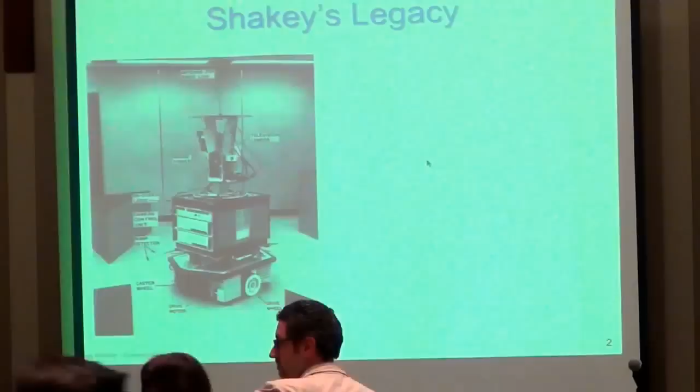In reflecting upon Shakey's legacy, I think the important point is that it provided a design pattern for an intelligent robotic system, including a vertically integrated system of subcomponents all the way from motor controllers, sensors, low-level controls, up to the highest level STRIPS-based task reasoning, which was really impressive for the time. This led to a design pattern that has been used ubiquitously in robotics over the last half-century.

What really got me excited about robotics 25 years ago when I started thinking about these problems is the idea of search-based artificial intelligence. In 1989, I joined Stanford and started thinking about how we could build computer programs that could compete at the level of humans. Then, in 1997, it finally happened: Deep Blue defeated Garry Kasparov.

What was interesting to me about the way the machines solved these problems was that they could do planning in the sense that they could reason about the consequences of actions. Deep Blue might examine 200 million chessboards per second, and that wouldn't be the way a human would solve the problem, but it sure is effective. My thought was, how can we leverage and build computer programs that enable robots and computers to exploit the skills they're good at, and maybe have humans fill in the gaps or the things they're not good at.

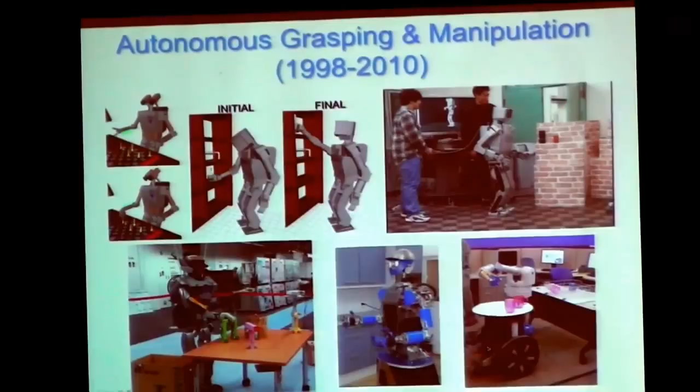I started looking at humanoid motion planning with various robots around the world, and one of the efforts I started looking at initially was autonomous grasping and manipulation. I'm going to explain how the planning in the A-star search developed for Shakey influenced a lot of the research and planning that my group at CMU got involved with, and things I'm still interested in.

I'm not sure why the movies are not playing. It's rather unfortunate. Let me just see if I do this way. I wonder if it works.

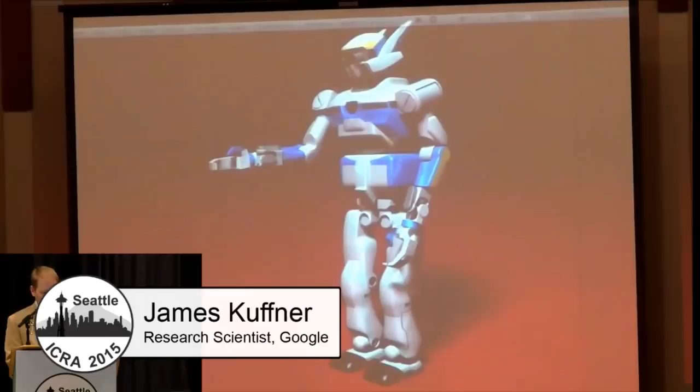Here we go. Okay, sorry.

One of the trade-offs here was that we wanted to make the common case fast, and have a computation balanced between exploring a space and rapidly converging on a solution. That led to this experiment trying to implement this online on a robot for manipulation.

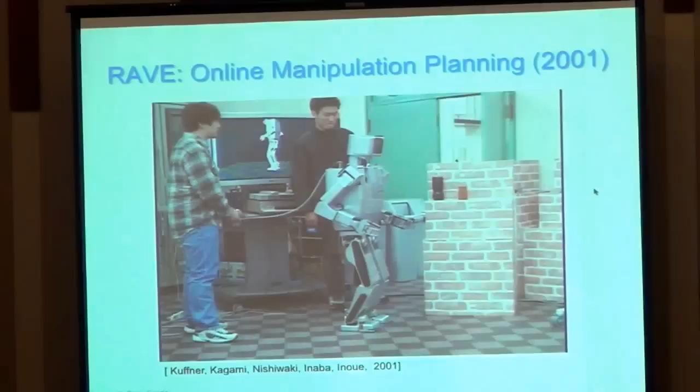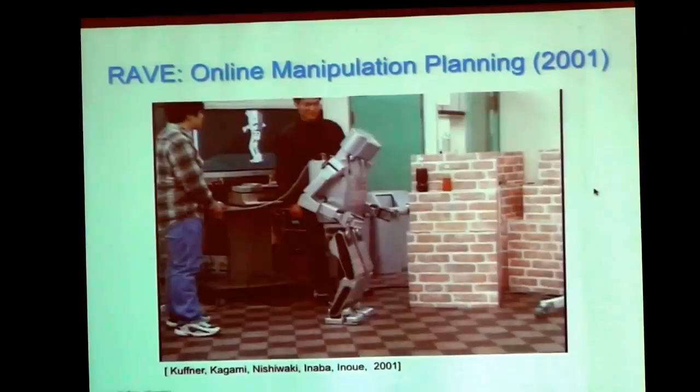Here we have a stereo vision camera in the head. We compute a path in the 7-dimensional space of the arm to grasp the bottle, that's collision-free, computes the grasp, and is able to compute another path. Then you have a beverage delivery system that is very expensive.

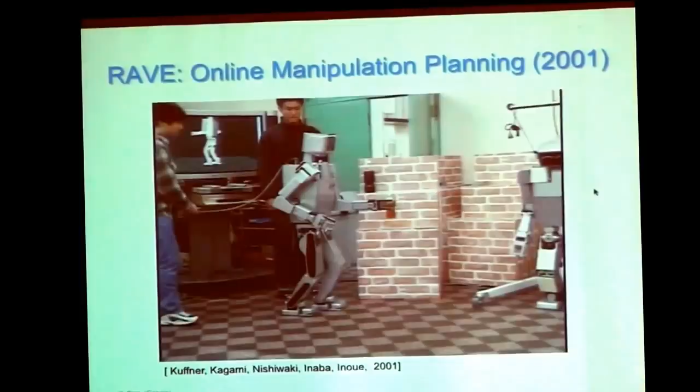This was mostly, in some sense, trying to prove a concept that we could build a system that was adaptive and dynamic, and I think that was in the spirit of Shakey. Shakey was able to not just perform pre-programmed tasks, but actually do dynamic tasks.

A lot of my students continued this work, putting in constraints like regrasping, and one of the things we looked at was how can you actually search in a space to find stable grasps. This is where I think cloud computing can also help find solutions.

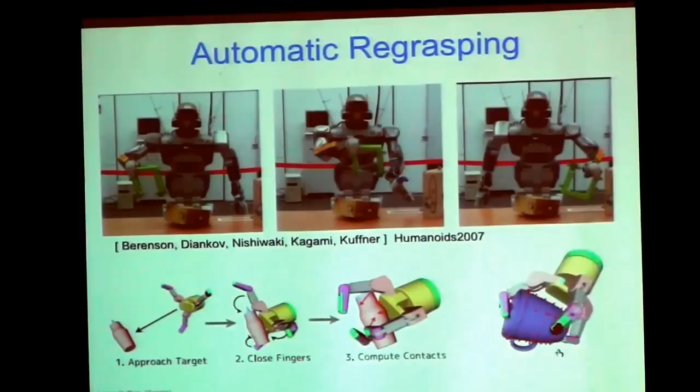You can build these simulations that run in a distributed manner, and once you've found stable solutions, you can remember them and recall them for future use. So this became integrated, and I would say a Shakey descendant, which we built at Carnegie Mellon's Quality of Life Technology Center, called the Home Exploring Robot Butler.

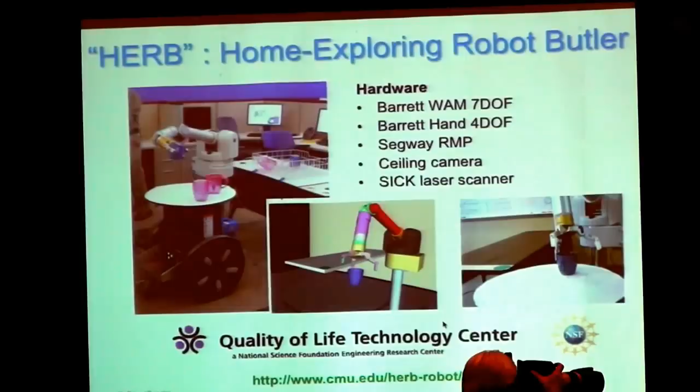It was a WAM arm and a hand on top of a Segway base, and we used a laser scanner to navigate and also to sense obstacles.

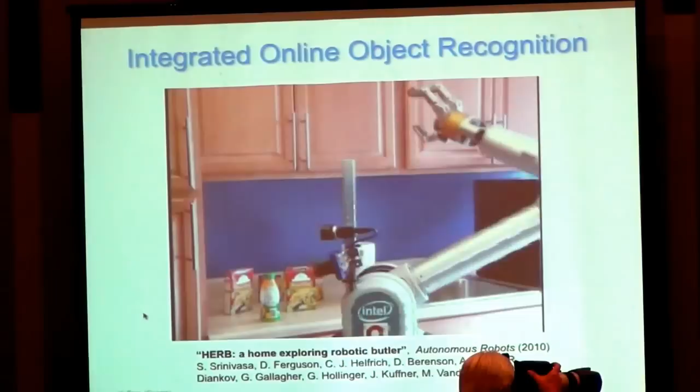We got it to the point where we could integrate a lot of different systems, including recognizing objects, computing a grasp, planning an arm motion path, and then verifying that the task has been completed.

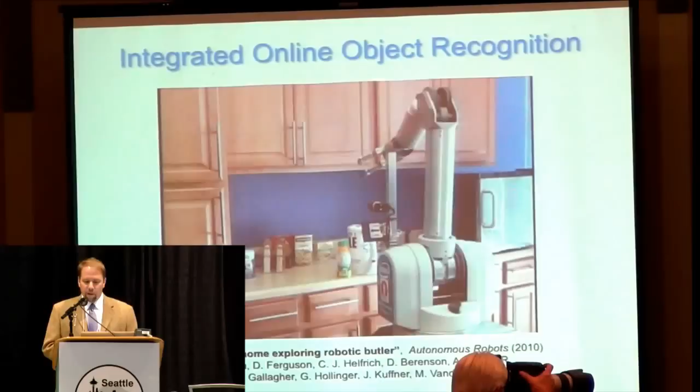What inspired us was a lot of work that had been done at conferences like ICRA and Humanoids, putting together systems that would scale to many objects, systems that would scale to many situations, and not just have robots in factories playing back pre-programmed motions.

One of my students, Dmitry Berenson, also looked at planning with constraints, so you could look at if you want to keep something vertical, or if you want to respect the fact that you have limited torque and need to move a heavy weight, how can you do it in an advantageous way?

My other student, Rosen, his PhD thesis built on a system that looks much like a lot of the subcomponents of Shakey, trying to build a series of sub-goals that are generated and then integrated with perception, feedback, and planning, building a kind of robot knowledge base.

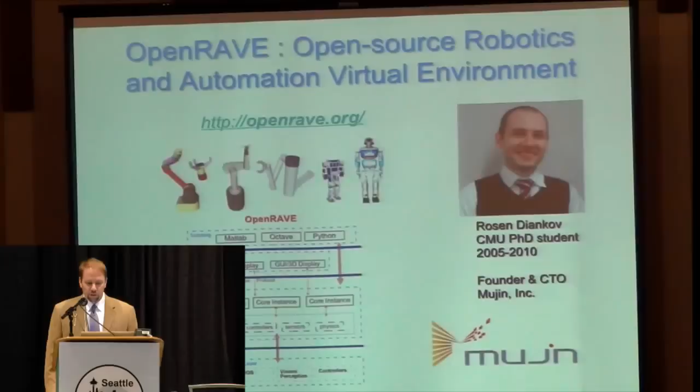By the way, each of these tasks are mostly open source as part of the Open Source Robotics and Automation Virtual Environment, which is a version of the software I had built when I was a grad student, now released to the open source community.

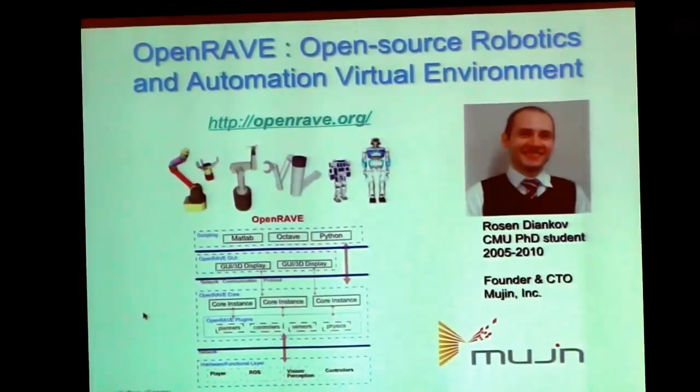Rosen is here today. He has a company now, founded around using this planning technology for automation, called Mujin. You should check it out.

One of the other things we wanted to do was have manipulation, but we also wanted navigation. Searching for navigation in the Shakey world was building a map and then exploring discrete cells. But if you did that in a 2D grid, your robot always had to circumvent obstacles, whereas a legged robot could actually step over or step on obstacles if needed.

So the thinking was to figure out a search-based framework for doing navigation for legged robots, and we came up with this concept of footstep planning. Joel Chestnutt, one of my first PhD students, who now works at Boston Dynamics, developed this technique.

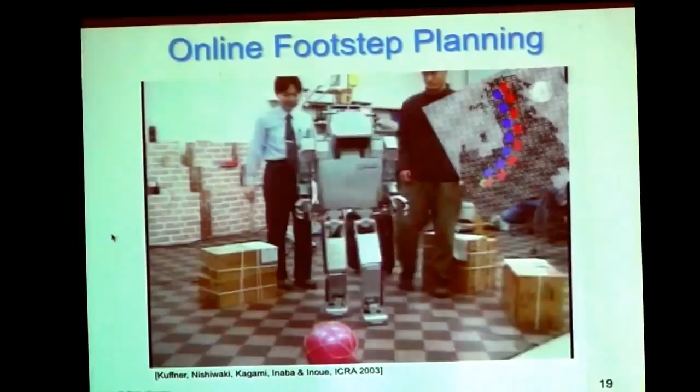This is one of the first videos we built with our colleagues at the University of Tokyo, at Professor Inoue and Inaba's lab, where we had onboard stereo vision. We would build a map, plan a path towards the goal. In this case, it would detect the red ball, then plan online a sequence of footsteps to navigate to the goal.

This first version of the footstep planner could examine a few thousand footstep candidates in about 3 seconds. But very soon we were able to upgrade the computers, and the joke in motion planning is that you can republish your research 10 years later with the title 'Real Time.' Just let Moore's Law do all the hard work.

But this is actually replanning from scratch every footstep cycle. This is a 1,000 millisecond step cycle, and it's able to replan from scratch where it is.

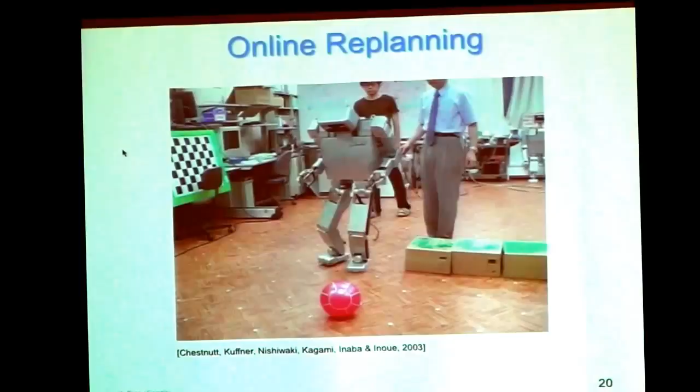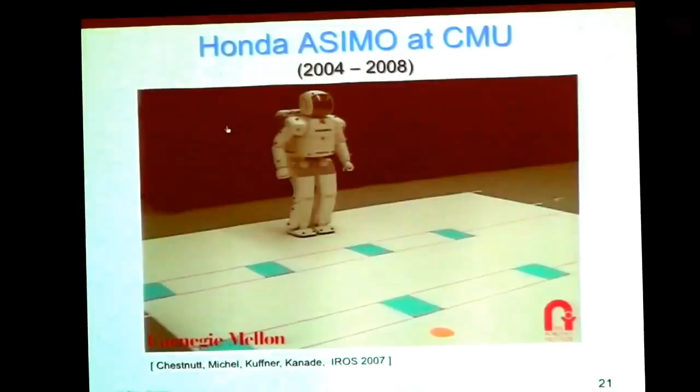So when there's small uncertainties in the execution, it's able to replan. That culminated into what we call ASIMO and the Pink Blades of Doom, an experiment we conducted at Carnegie Mellon with several of my students. Since we didn't have access to the controls of the Honda controllers, but we could observe that it was deterministic, we could build essentially a motion map for how to control and move it, and we were able to run this planner. This has an 800 millisecond cycle, and it can also plan in both space and time.

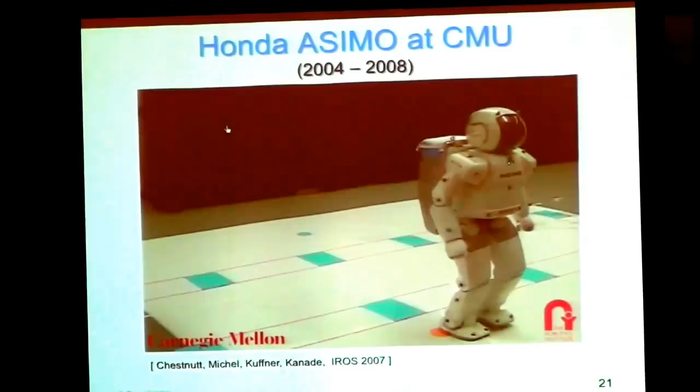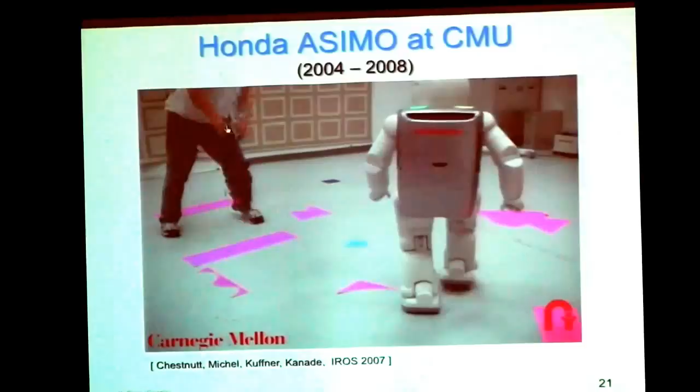So if you have predictable motions, we could have online tracking of the obstacles. We called this ASIMO Plays Frogger. This shows an example of the online search, and by this time we're searching upwards of 10,000 states in one step cycle. There's my student Joel. He's able to have the goal location moved around in real time. The robot's tracking it, and it's constantly replanning and trying to avoid stepping on the red areas. And the poor robot just keeps getting tortured.

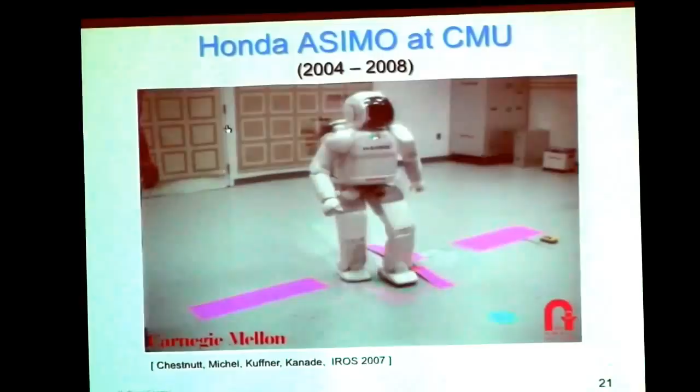Now, what's interesting is that we were able to deploy this on several different robots. It's the same planning framework, similar to A-star search. Here, we're actually estimating in real time the rotational velocity as well as the position so that we can plan in space and time. So this would be like the robot trying to go through a revolving door. This is actually what the robot sees, in this case an off-board perception. We're able to track and estimate, and because we can estimate where the future positions of the obstacles are, we can build this plan.

This is actually pretty tough for a human to do. I remember trying to do it myself and stepping on it many times.

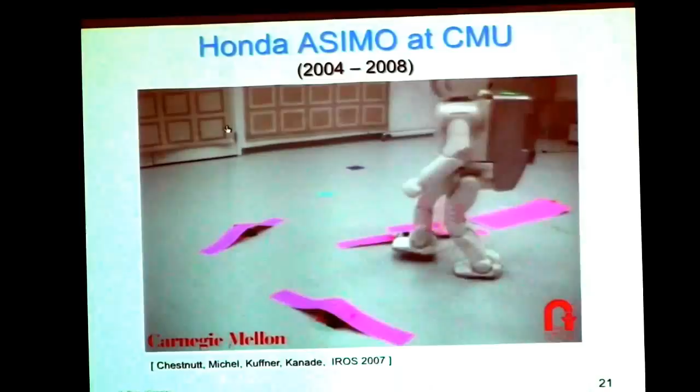This was deployed on other robots, and I just wanted to point out this is Joel working at AIST lab in Tokyo, in Odaiba. We built an augmented reality interface to control the robot so that you can actually see overlaid on the real world the plan that the robot has actually computed. So you can see he just drew a path on the world saying, I'd like the robot to go here. The heuristic is modified to try and stay as close as possible to the plan, but you can see in real time the robot providing feedback as to what it's actually planning to do and then executing, and it replans from its current position as it gets to the goal.

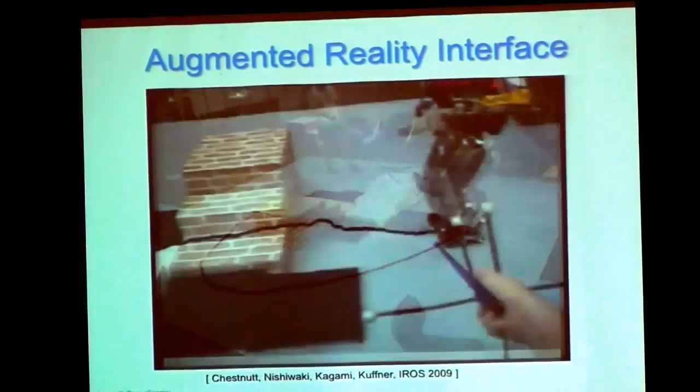And you can see from what it looks like from the operator view, I think that with the new research in virtual reality and augmented reality, this could be some very compelling user interfaces. Here it's actually stepping up on an obstacle. I think I kind of like this interface because when you have full autonomy on a robot, it'll surprise you if it does something unexpected. So here you actually get a little preview of what it's planning to do, and you can actually stop it or have it replan if you don't like the plan that it's chosen.

My student, Matt Zucker, started looking at dynamic actions. These are things for, like Little Dog, for the learning locomotion program that was part of DARPA. I'll just play these here. What's interesting is you could imagine some of these dynamic actions as nodes in a footstep-like plan. So you could imagine caching some motor control policies that then you search for, sequence together these motor primitives, and then have them executed online.

I have another student, Mike Stilman, who unfortunately passed away last year, but he actually looked at levels of planning that were most similar to Shaky. He looked at manipulation and also navigation among movable obstacles. The idea was if the robot has a navigation goal that is currently obstructed, can it proactively move objects out of the way in order to clear a path? So the object becomes something that's movable. If you have a mobile manipulator that can actually move obstacles out of the way, you can solve this problem. So we built, and Mike had built, and some of his students are here presenting at the conference, systems related to trying to reconnect AI task planning with the lower level motion and geometric planning.

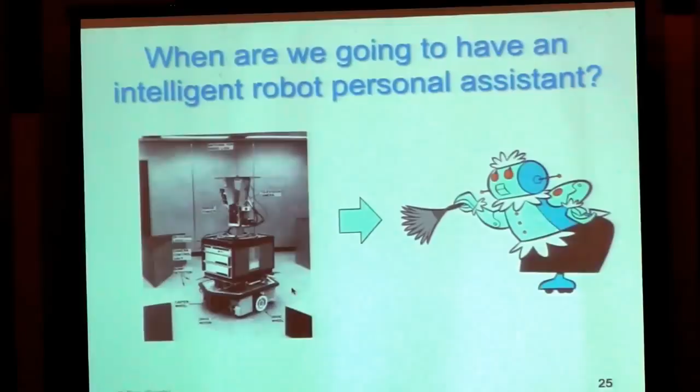So we learned a lot of things during that research, and one of the things I kept scratching my head about after all of this hard work was, when are we going to have an intelligent robot personal assistant? I tried to think hard about what was it that is so hard, and why after half a century we still don't have what we had hoped Shaky would result in—some intelligent robot we could buy right now. I like to call it a research challenge snowball, and I think it comes from unstructured environments. Because we have unstructured environments, unknown objects, unknown obstacles, it means we have to use online perception, and we can't really cheat with a priori models when you have unstructured environments.

That also means because you have to do online perception and things may move around in the world, you can't use predefined trajectories. So that means you have to have online motion computation. And finally, you might have dynamic tasking because you can't rely on predefined sequences in all cases, and you may need to restart if one task fails or recompute a task plan.

So because you have to build all of these things and solve all of these problems, I think it has been very, very hard. And these problems still exist, but what I'd like to argue is that we are now poised, I believe, to start solving many of these problems.

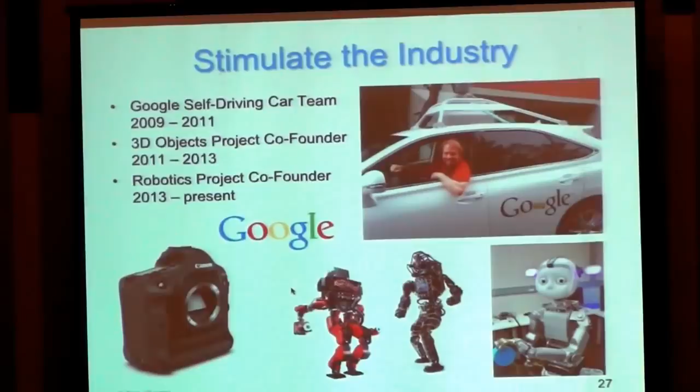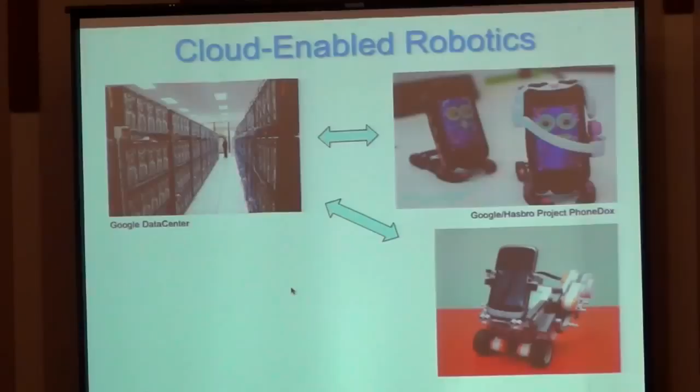And I left academia and in 2009 felt that, okay, I'm going to try and stimulate the industry. I joined the Google self-driving car team, and I founded a project involved with 3D scanning at Google, and then founded the Robotics project. And one of the things that was exciting to me at the time was thinking about what would change for a planning system if you had suddenly a massive distributed computation available as a resource.

So back in 2011, we built a library and open sourced it so that you could turn any Android phone into a little robot. So every Android phone since Froyo, you can plug in a USB board, and then you're able to control cameras. You can have motors. You can basically build your own cell bot.

We also, some of my colleagues at Google, created a native implementation of ROS on Android that they also open sourced. And what was interesting to me was that people were turning over cell phones at about an 18-month clip. So that means every 18 months, people were basically handing a supercomputer to their kids because they didn't know what to do with their old phone, or they were selling it on eBay for 10 bucks.

And so the thought was, well, wow, you could actually build a robot out of this because it has most of the things that a robot wants, like GPS, like an accelerometer, like 2 cameras, like a microphone, like a big screen, like a battery, like a GPU, like CPU, memory, all these things it already has, Wi-Fi, Bluetooth, 3G.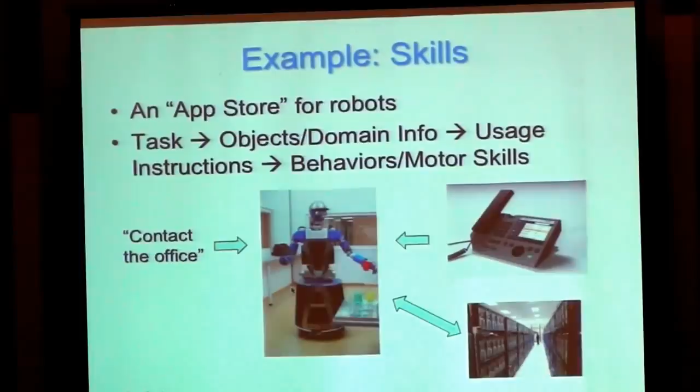Finally, I think skills are something that should be transferable. We should have an app store for robots—tasks, objects, and domain information should be translated into a library of reusable skills. The example I always use in my talks is from The Matrix. I really like the idea of a robot being able to say, 'I need a helicopter pilot program,' and be able to download that.

Finally, I'd like to conclude with Google Now. There are a lot of companies investing in this, but it's more than just answers to factual queries—it's now powered by the knowledge graph.

It's interesting that Google has gone from a company where we had 10 blue links, statistically showing what the PageRank algorithm decided was most relevant for a search, to looking at more curated information. Instead of having you click a link to get information, we try to provide it directly to you. We're curating this large database of facts.

We believe this should also be available to robots—you can think of Google Now as the kernel of a small brain for a robot personal assistant. So finally, let's look at some observations.

I think right now, big data and deep learning are powering amazing advances in speech and translation. A lot of companies are competing in this area. Standard data sets like ImageNet are really increasing the ability to do object recognition in real time using CNNs.

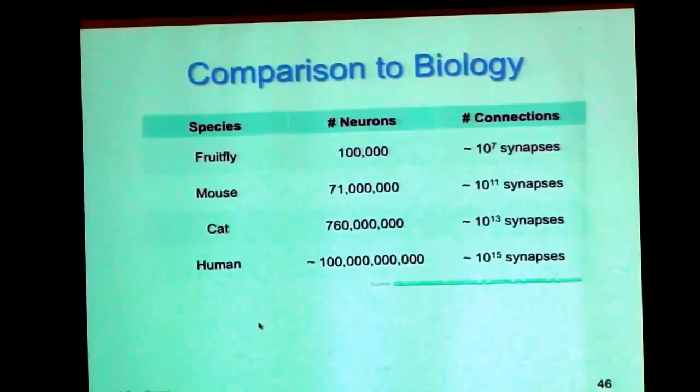Compared to biology, we've actually got an estimate that there's 100 billion neurons in the human brain with 10 to the 15, that's a quadrillion synapses. And I believe that we can reach that storage now using a distributed computer. And you can see how that compares to other animals.

I think these grand challenges, so now let's say a desktop PC even, you might be able to store with 64 gigabytes of RAM, depending upon how you cleverly encode the connections, you might be able to actually store a net of that size. So maybe something, not quite a mouse, but maybe approaching the intelligence of a mouse even on your desktop. Finally, I think these grand challenges are very exciting.

There's a lot of interest and enthusiasm around the Amazon Challenge and the DARPA Robotics Challenge, which will be held in California next month. And these are all very great. I think we should have more of those. I think that definitely stimulated many of us to work on self-driving cars with the Urban Challenge, and these things get the general public also excited about the potential for this technology.

So if we think about rebooting Shakey in an era of cloud-enabled computing, I think vertically integrated systems, the time is ripe to reconnect the AI task planning and motor control. That was something that the Shakey project did really well and admirably for the time. Now we have so much more computing resources, we should be able to do much more exciting things and have robots that truly can react in a dynamic way to tasks.

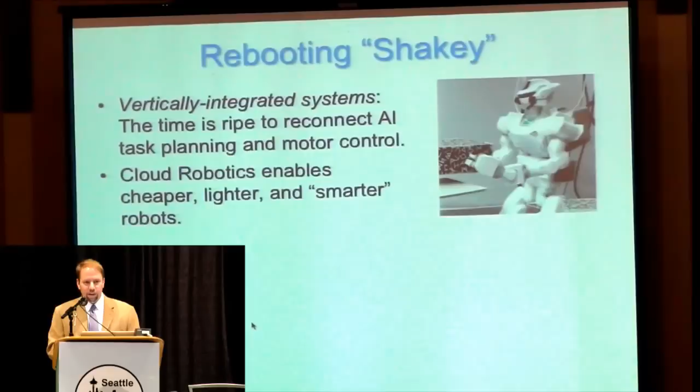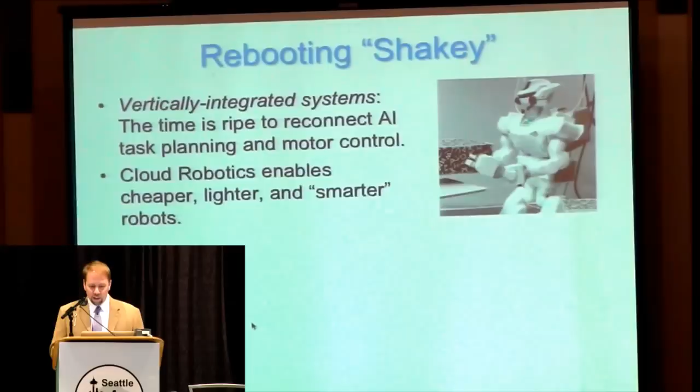I believe that cloud robotics enables cheaper, lighter, and smarter robots. We can offload a lot of the heavy compute things and a lot of the data storage to the cloud, and then have enough local computing client side to keep the robot safe and functional. So the way I like to say it is, it's much like your phone. When your phone doesn't have a data connection, you can still use it, it's just not as useful. And that's the way I view a cloud-connected robot.

A rapidly evolving infrastructure already exists. There's many APIs that are already available. You're welcome to use many of them. Many of them are provided for free up to certain limitations in terms of traffic. If you create an app that uses lots of traffic, that's good, and everybody can share in the benefit of that.

A massive computing resource is available now for deep learning, and I think this is very exciting. A lot of people are excited about it, but we do need data, and I think that's one of the challenges. So looking at how we can leverage these in more domains for the robot, particularly motor control, will be really interesting.

Finally, I think if we can create a shared knowledge base for these robots, we'll be able to enable the robot revolution. Robot experiences and user interactions and learned skills are going to be something that we'll be able to transfer between robots. I have 4 kids, and each one of them has spilled milk probably 100 times over their lifetime. Wouldn't it be really nice if you could train one robot not to spill and then transfer that program to every robot, so then every robot doesn't have to spill anymore? That's one of the benefits.